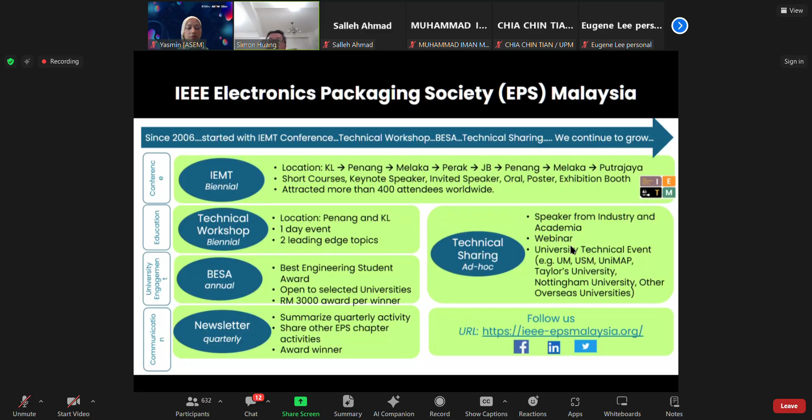Okay, this is the news in 2024. Prime Minister Anwar announced Malaysia will train certified engineers to become a chip hub.

This is quite important because, to be honest, for the past 3 years, we did see the semiconductor supply chain keep moving out from Greater China to Korea, to Japan, to Vietnam, Thailand, and including Malaysia. So that's why Anwar has ambitions to train more and more engineers in order to win this business.

So not only ASEM, but also EPS, we did contribute to build a talent pool through the webinar, the conference, the training.

Okay, this is a quick introduction about myself. 16 years in the semiconductor packaging backend, including wafer level CSP, fan-out wafer level packaging, and panel level.

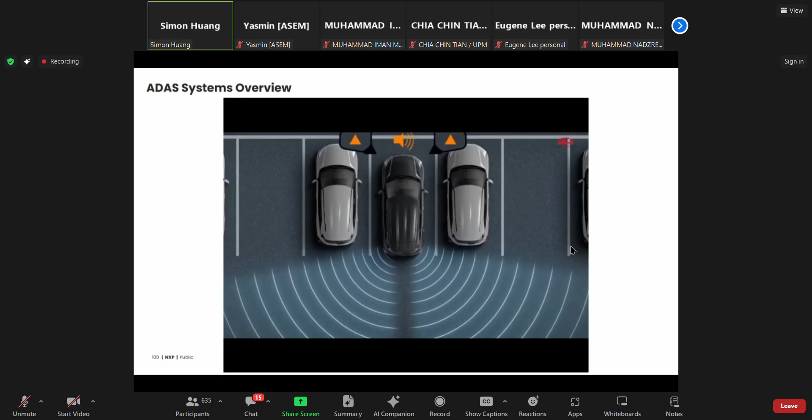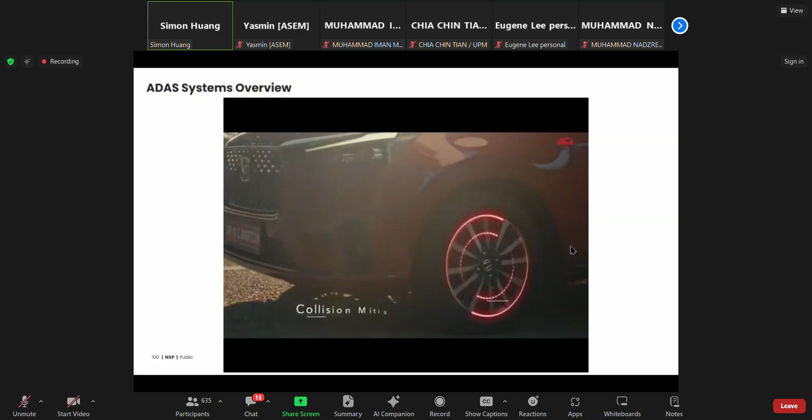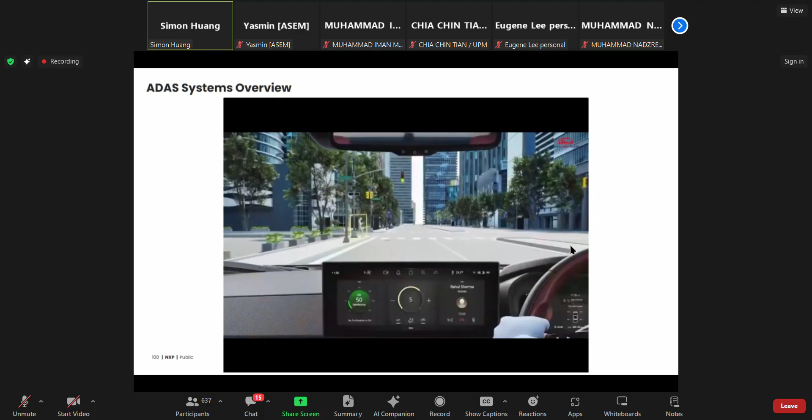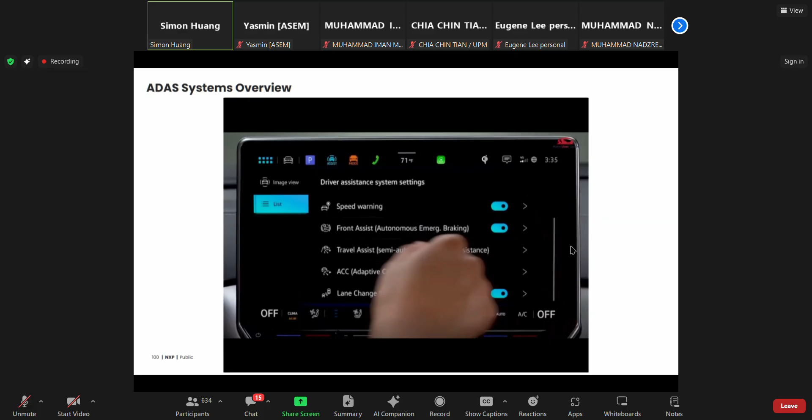Have you ever wondered how modern cars can detect obstacles, maintain lanes, and even brake automatically? Welcome to the world of Advanced Driver Assistance Systems, or ADAS, an innovation that's making driving safer, smarter, and more convenient. What is ADAS? Advanced Driver Assistance Systems is a collection of technologies designed to assist drivers and reduce human error on the road. By using sensors, cameras, radar, and artificial intelligence, ADAS enhances vehicle safety and driving comfort. These systems act like an extra pair of eyes on the road, providing real-time alerts and even taking control when necessary to prevent accidents. If we talk about key features, ADAS includes various safety features, some of which you might already have in your car. Let's check them out. Adaptive Cruise Control maintains speed and automatically adjusts to keep a safe distance from the vehicle ahead. Lane Departure Warning and Lane Keeping Assist alerts the driver when unintentionally drifting out of the lane and gently steers the car back.

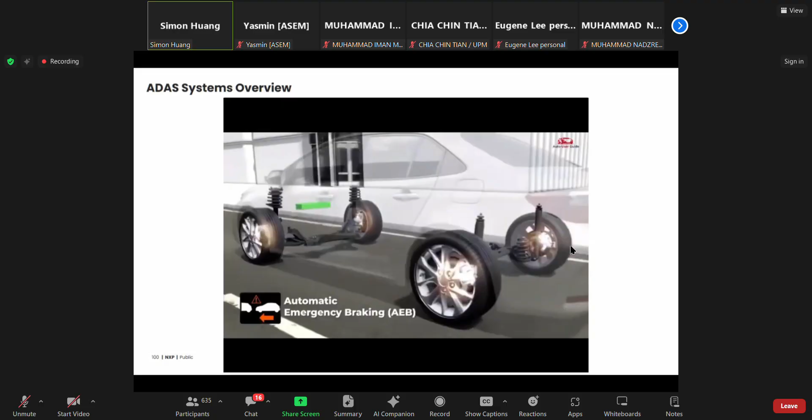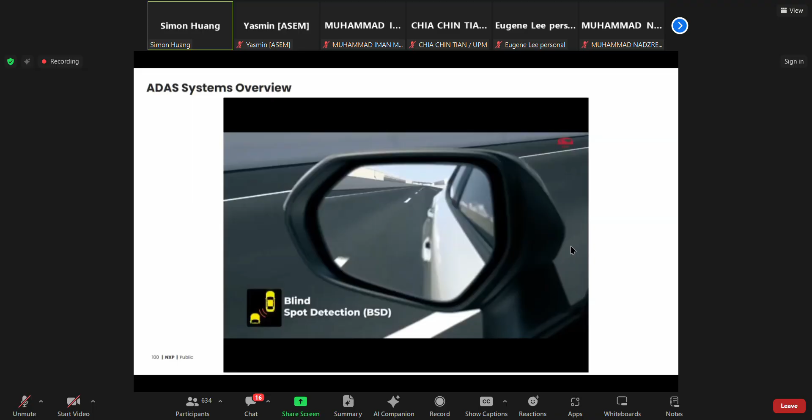Automatic Emergency Braking detects potential collisions and applies the brakes to avoid or minimize impact. Blind Spot Detection monitors the vehicle's blind spots and warns the driver of approaching vehicles. Traffic Sign Recognition reads road signs like speed limits and stop signs to keep drivers informed. Parking Assist and 360-degree cameras help with parking by detecting obstacles and providing a bird's-eye view of the surroundings.

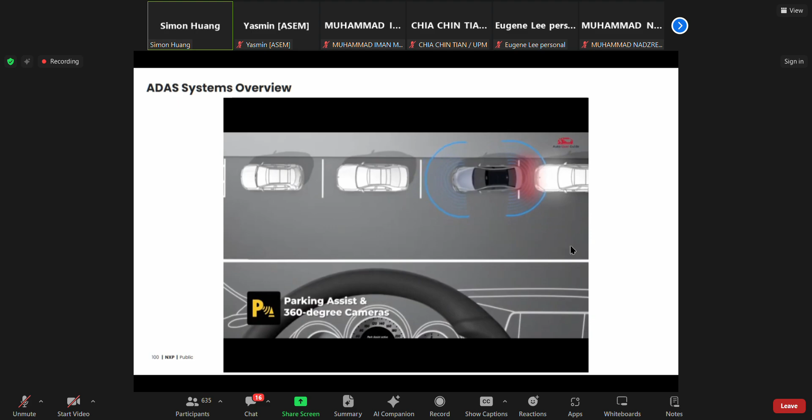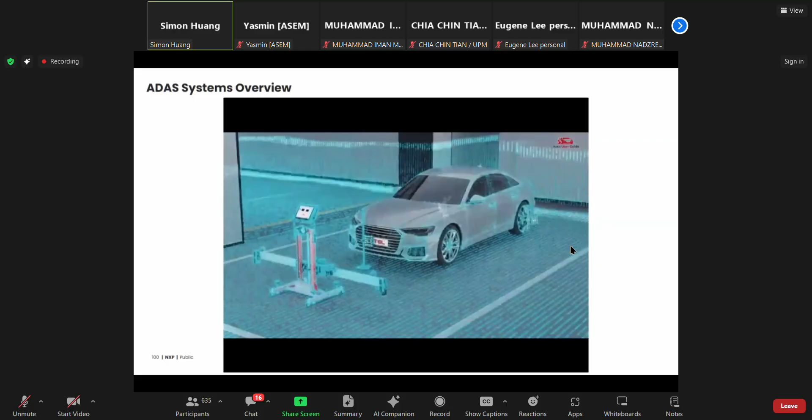With these advanced features, ADAS significantly reduces driver workload and increases road safety. But how does it all work? ADAS relies on a combination of hardware and software to function efficiently. Here's a quick look at its key components.

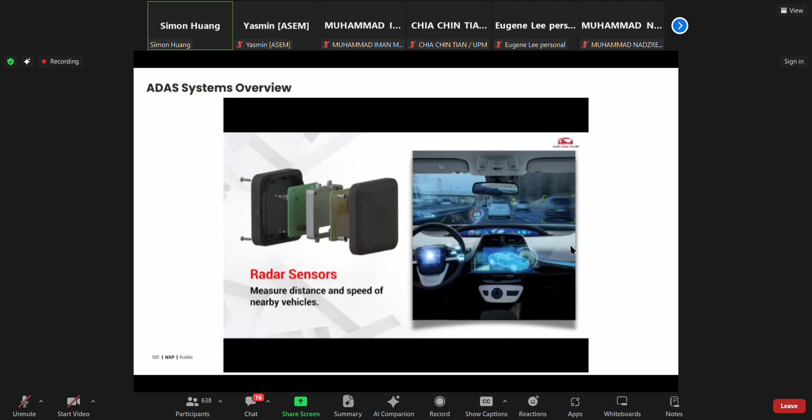Cameras identify lane markings, traffic signs, and pedestrians. Radar sensors measure distance and speed of nearby vehicles. LiDAR, light detection and ranging, creates a 3D map of the surroundings for precise detection. Ultrasonic sensors assist with parking and detecting objects at close range.

ECU, Electronic Control Unit, is the brain of the system that processes all data and makes decisions. These components analyze the driving environment in real time to enhance safety. But what's next for ADAS?

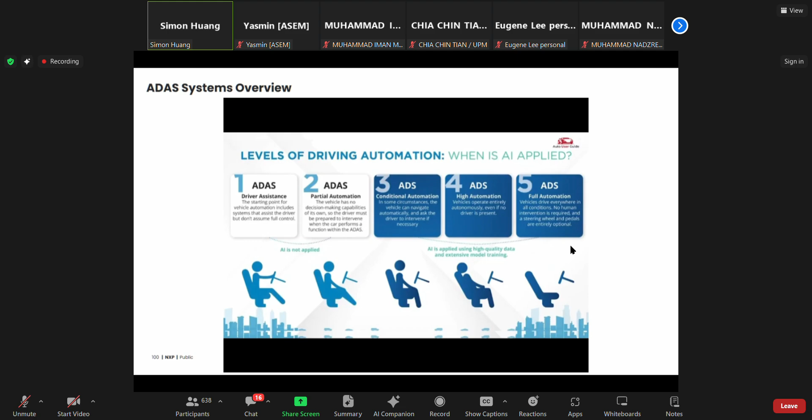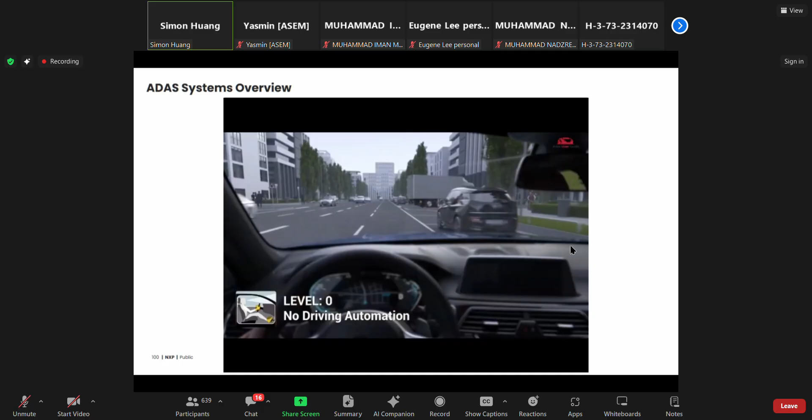Levels of driving automation: driving automation is categorized into 6 levels. At level 0, the driver is entirely responsible for all driving tasks. The vehicle may provide momentary assistance through warnings or emergency interventions, but control remains with the driver.

Level 1 introduces systems that assist with either steering or acceleration-deceleration. An example is adaptive cruise control, where the vehicle adjusts its speed to maintain a safe following distance.

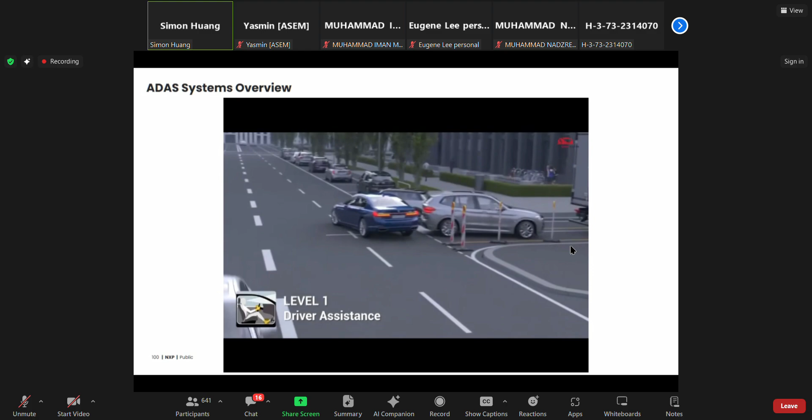At level 2, the vehicle can control both steering and speed simultaneously under certain conditions. However, the driver must remain engaged and monitor the environment at all times.

At level 3, vehicles can manage most driving tasks in specific conditions, such as highway traffic jams. The driver can disengage from driving, but must be ready to take over when the system requests.

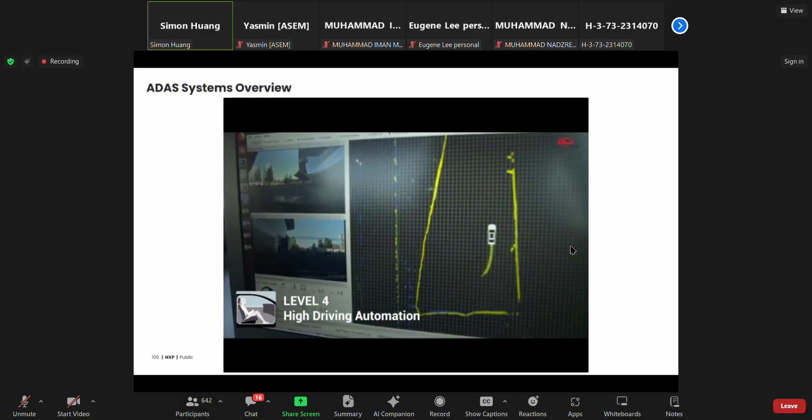At level 4, the vehicle is capable of performing all driving functions within certain environments, like urban centers or designated routes, without human intervention. The system can handle scenarios even if the driver doesn't respond to a takeover request.

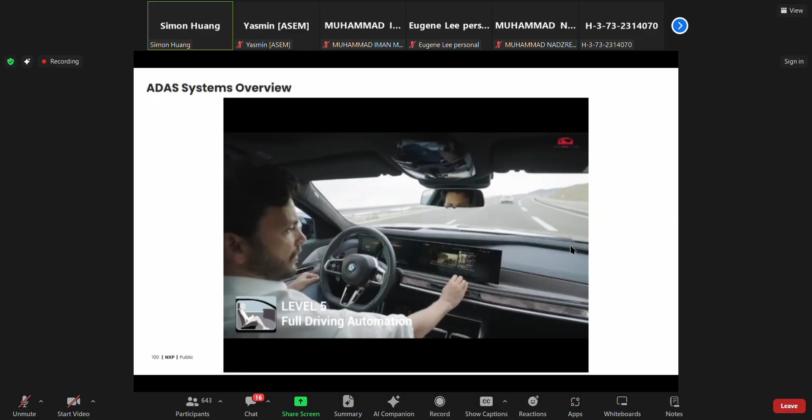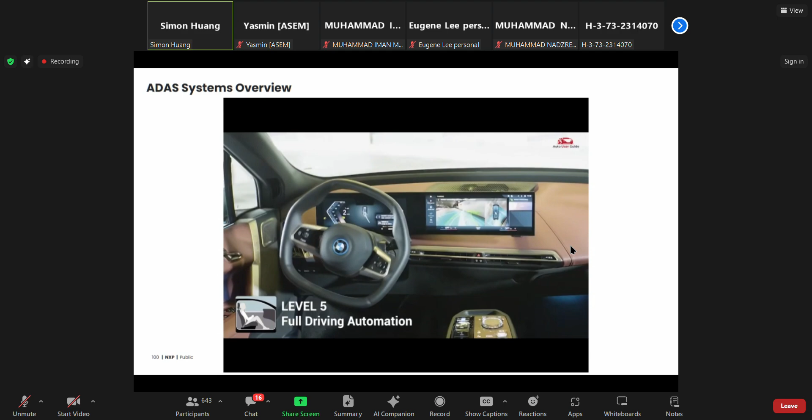Level 5 represents complete automation. The vehicle can operate on any road and in any condition a human driver could, without any human input. These vehicles may not even have traditional controls like a steering wheel or pedals.

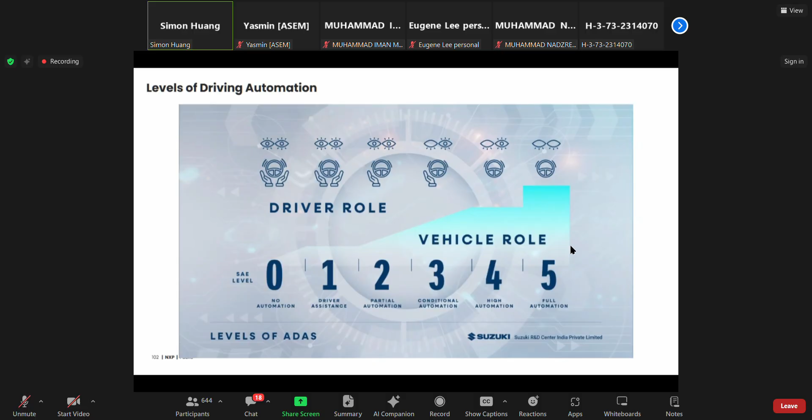In the real world, some companies and cities are already operating level 4 vehicles without any human driver, including 3 cities in the USA operated by Waymo, 3 cities in China, and 1 city in Abu Dhabi. So this is really happening in the world.

But this level 4 comes with some conditions, on special roads with good weather. If there is bad weather, then level 4 cannot be operated, in order to protect human life.

Okay, then let's step into the ECU, Electronic Control Unit, or we call it the electronic control module. In fact, there are so many electronic control units within a car. I will play a video, but since it's too long, I'll only play roughly 3 minutes.

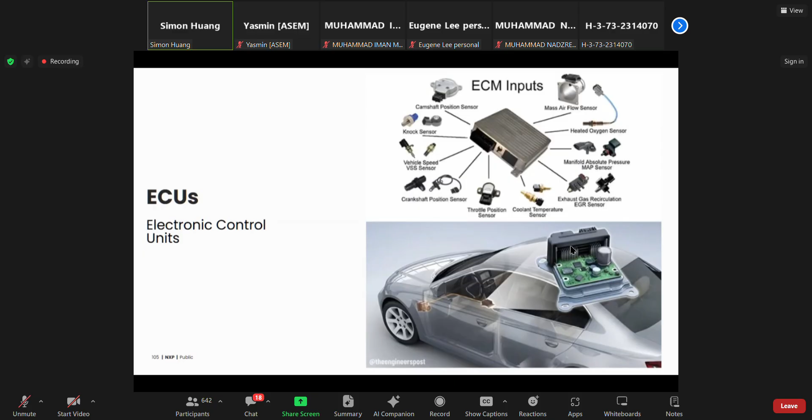This is the overview of the different domains, the ECU names, and their primary functions. Okay, then I'll spend more time on the video playback.

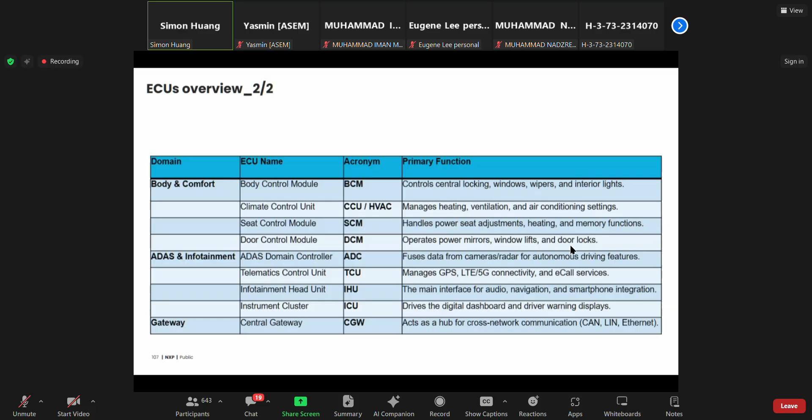In fact, the ECU is the brain of the system. They process data and make decisions. Wait a moment now, here's the video.

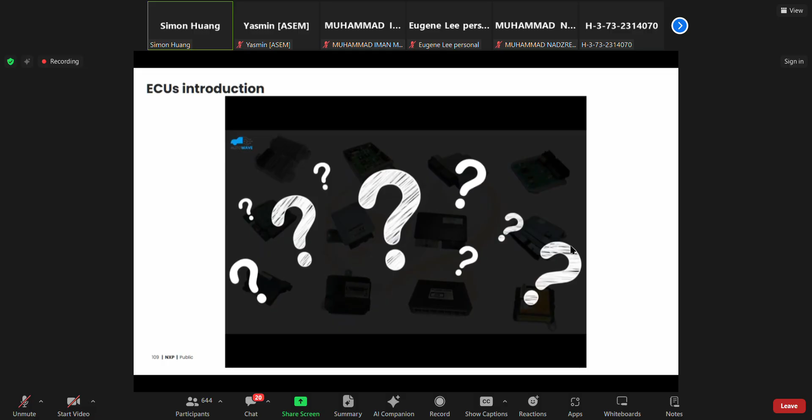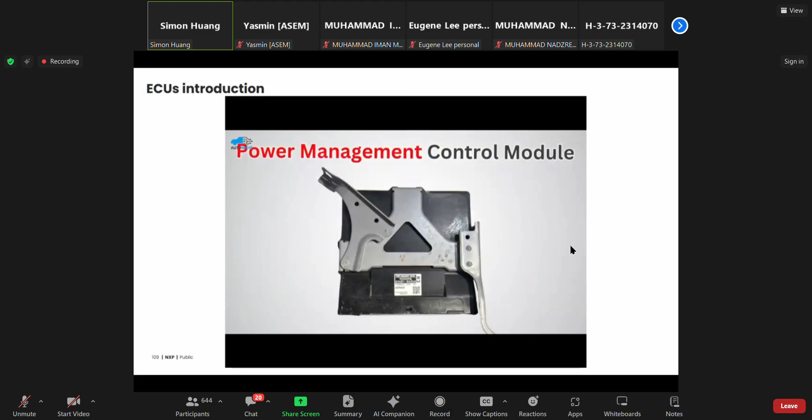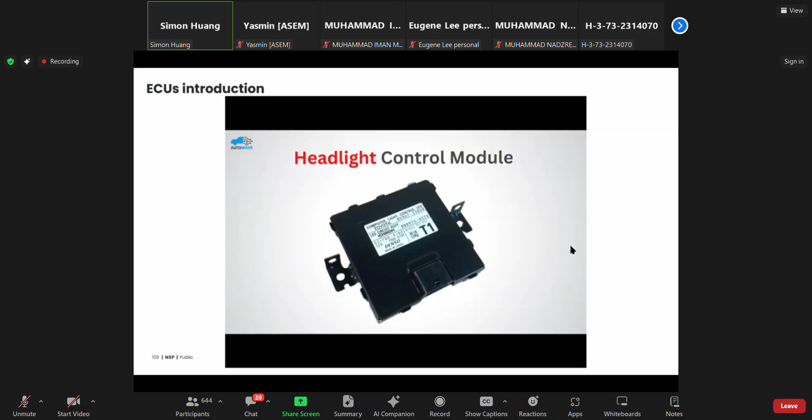In today's video, we will learn how many ECUs, that means electronic control units, are found in a mid-range car and in a modern car. We will also learn which computer controls which system. Today, we will understand every single ECU present in the car in a very easy and clear way. After watching this video, you will not need to ask anyone what BCM does, what is the difference between ECM and PCM, and what is the role of the other computers. The video might be a bit long, and in the end, we will also cover many very important and basic things related to ECU, so this is the most important video for EFI auto electrician beginners.

Before moving forward, let's understand some general things so that you don't get confused later. ECU means Electronic Control Unit. This is basically a general term which is used for any electronic control unit in a vehicle, like ECM, BCM, PCM, TCM, and others. That means we can say all of these are electronic control units. Some manufacturers also call ECU as Engine Control Unit. That's why its exact meaning depends on the context, whether we are talking about a general electronic control unit or specifically an engine control unit.

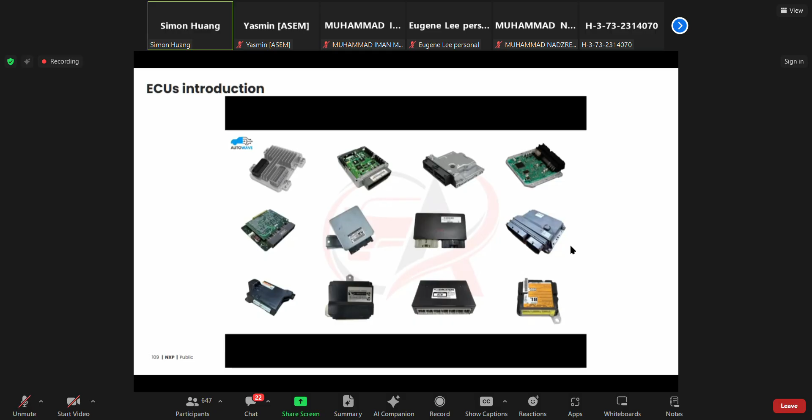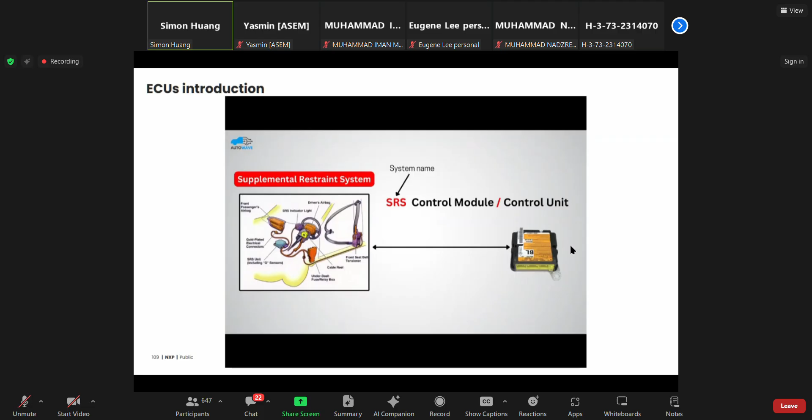All the computers in a car are called by their system name with control unit or control module. For example, the computer that controls the engine is called the engine control unit or engine control module. The computer that controls the transmission is called the transmission control module. In the same way, ABS is one system, and the computer that controls this whole system is called the ABS control module or ABS control unit. SRS is also one system, and the computer that controls this system is called the SRS control module or SRS control unit. Some manufacturers say control unit and some say control module. Actually, both are two names for the same thing.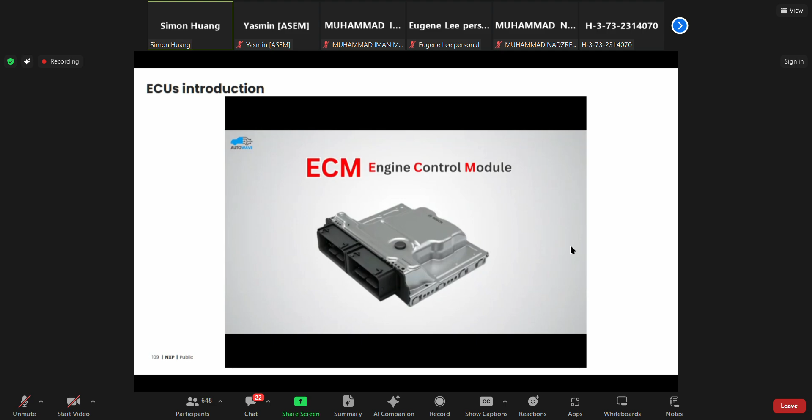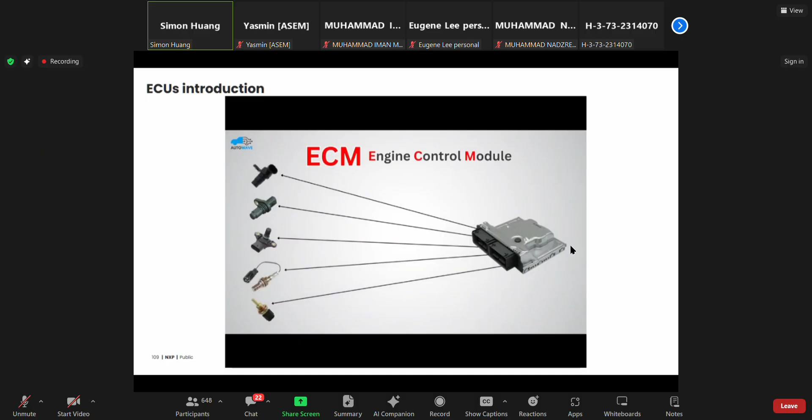ECM full form is Engine Control Module. ECM is responsible for all parts of the engine. All sensors on the engine, like camshaft position sensor, crankshaft position sensor, MAP sensor, oxygen sensor, coolant temperature sensor, and others, are controlled by this unit. This ECU gives power supply to every sensor and receives output in return, so that different engine operations like fuel injection, ignition timing, air-fuel ratio, idle speed, and others can be controlled.

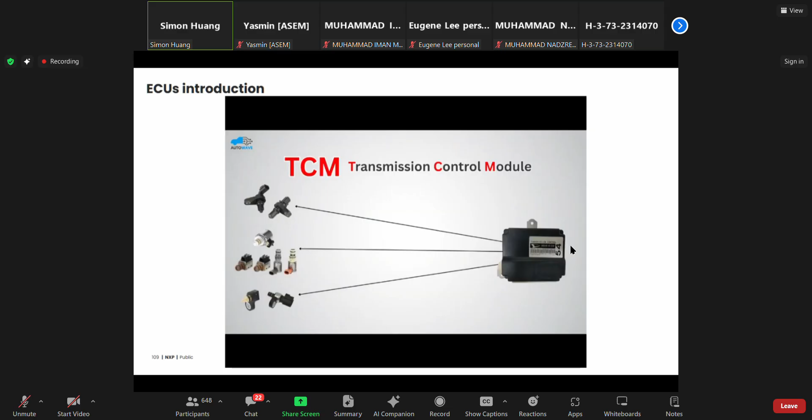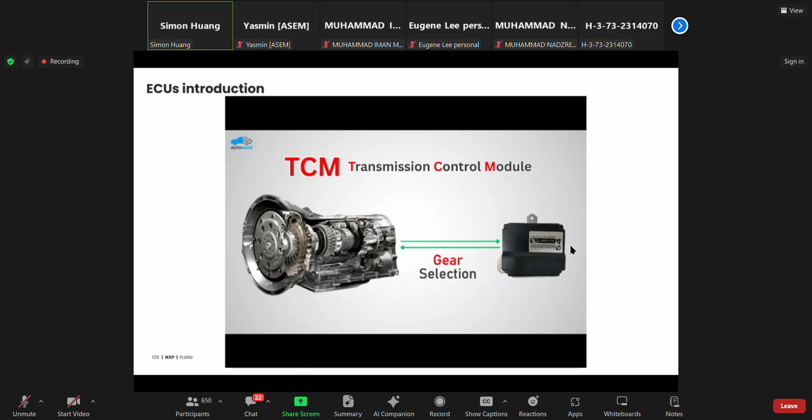TCM full form is Transmission Control Module. TCM is responsible for all parts of the automatic transmission. All sensors and actuators on the automatic transmission, like input and output shaft speed sensors, solenoids, oil pressure and oil temperature sensors, and others, are controlled through TCM. TCM gives input supply to all sensors on the transmission and receives output signals in return, so that transmission operations like shift timing and gear selection can be controlled. Note, manual cars do not have TCM because in manual cars, operations like shift timing and gear selection are the driver's responsibility.

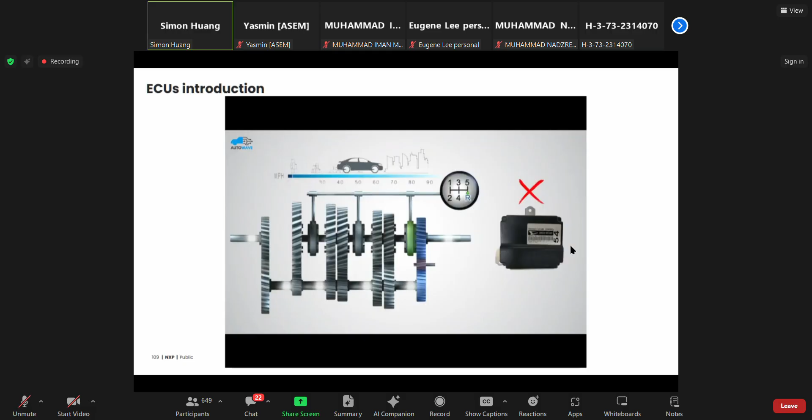PCM full form is Powertrain Control Module. It basically combines ECM and TCM into one single unit. That means, in vehicles where there is only one electronic control unit for both ECM and TCM, it is called PCM, Powertrain Control Module. PCM monitors and controls all operational parameters of both engine and transmission.

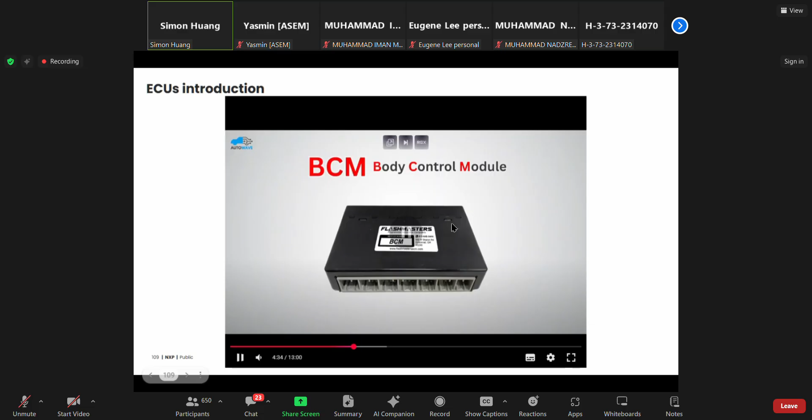BCM full form is Body Control Module. BCM controls the electrical systems related to the vehicle body, like power windows, central lock. Okay, so let me stop because the video is too long.

Next section is about BMS, the battery management system. It's quite important for EV cars especially. There are some elements of the BMS, including the controller, the power management module, thermal management system, and the communication interface, and the safety switch. When the temperature increased too high, then it will switch off to protect the car and prevent the battery burnout. So these are the key purposes of the battery management system. It will monitor the battery, protect the battery, estimate the battery status, maximize the performance, and report it to the user or the external devices.

There's a good video for us to learn about the battery management system. A standard lithium-ion battery pack comes with several benefits. A few examples include high energy density, more charge cycles, low self-discharge rate, and lightweight and compact. However, the outcome could be hazardous if the battery is subjected to unexpected conditions.

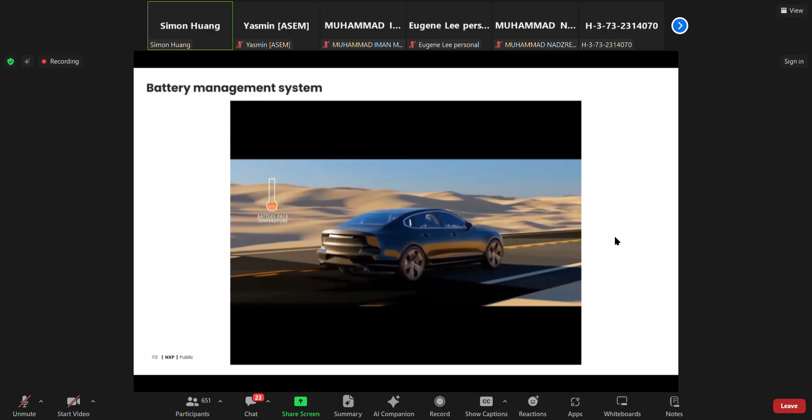Imagine your vehicle running on a sunny day when temperatures could get really hot. When temperatures get above 55 degrees Celsius, a lithium-ion battery could experience something called a thermal runaway, where the battery pack enters an uncontrollable self-heating state and ignites into flames. Now, imagine your vehicle running on a cold winter day when temperatures could reach lower than negative 20 degrees Celsius. With the decrease in temperature, the electrolyte's viscosity will increase, reducing the ionic conductivity, and hence the cell's lifetime drastically decreases.

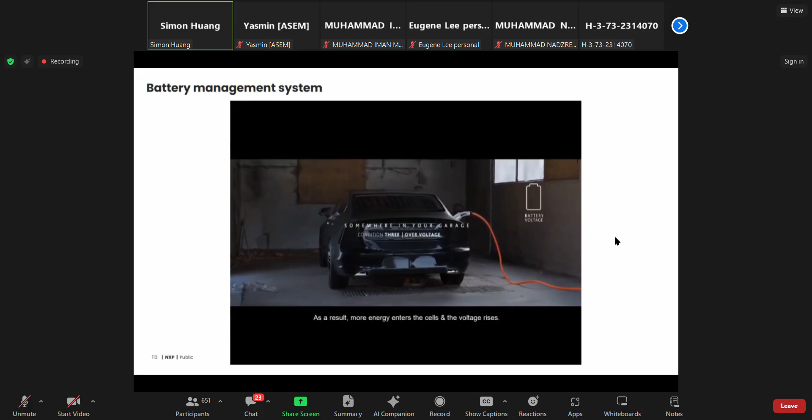Now, imagine charging your lithium-ion battery pack. As a result, more energy enters the cells and the voltage rises. Suppose the battery voltage exceeds the maximum charging voltage. In that case, the excess energy leads to thermal runaway, which damages the battery pack by igniting it into flames. It is recommended to discharge your lithium-ion battery at a constant current and charge at a constant safe rate. However, if it is discharged at a high current or charged too fast, the battery capacity drops over time.

Pulse charging methods have been developed as one of the fast charging methods for lithium-ion batteries. This technique applies a continuous constant current pulse with certain pulse width until the battery is fully charged. The lithium-ion cell might get damaged if operated at high pulse currents for more than a few seconds.

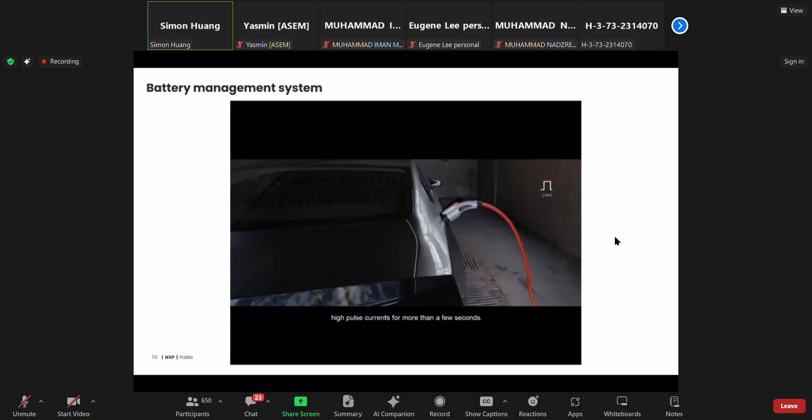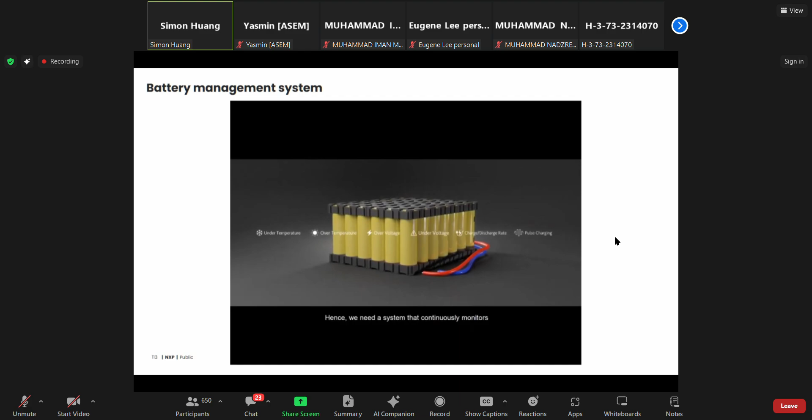In the above different conditions, we saw that a lithium-ion battery is highly liable to unfavorable conditions. Hence, we need a system that continuously monitors the cells to avoid unwanted self-damaging hazards. This is where a battery management system comes in.

The primary purpose of the BMS is to monitor the battery, to protect the battery, to estimate the battery state, to maximize the battery performance, and to report to users and/or external devices, for example the electric vehicle ECU. The BMS does this by measuring the cell voltage, the temperature of the cell, and the cell current. The BMS then collects all the data from these parameters and uses its inbuilt algorithm to estimate parameters such as the battery voltage, state of charge, state of health, temperature, battery capacity, and other critical measurements.

For example, imagine if the battery voltage rises more than its recommended value, then the battery management system automatically cuts off the charging.

Another essential functionality the BMS performs is intelligent cell balancing, wherein the battery voltage is equalized to improve capacity. Also, these concepts will be explored in detail in our future videos. Finally, the BMS should be able to communicate the data or report to users and/or external devices, such as the vehicle ECU, using communication protocols such as CAN bus, RS-485, UART, etc.

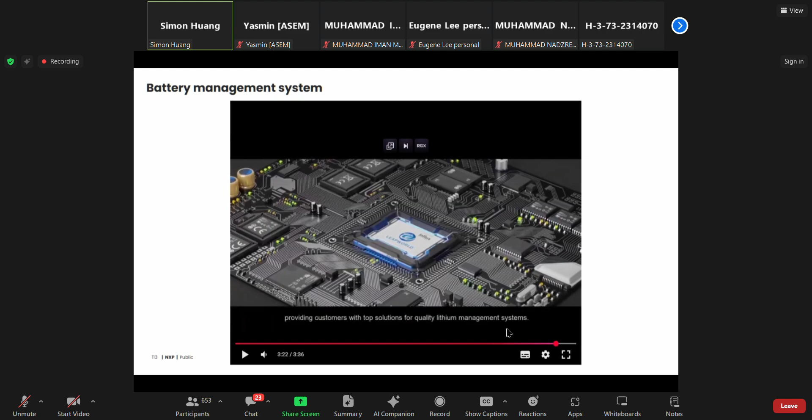Okay, now this is the last session about the radar, the radio detection and ranging. In fact, NXP is the leader of the car radar chipset provider.

Sorry, I'm lagging on the internet. So I will play a video about NXP's real product for the car radar.

So I will show a video about NXP's product. It covers the 4D image radar. It co-works with different companies.

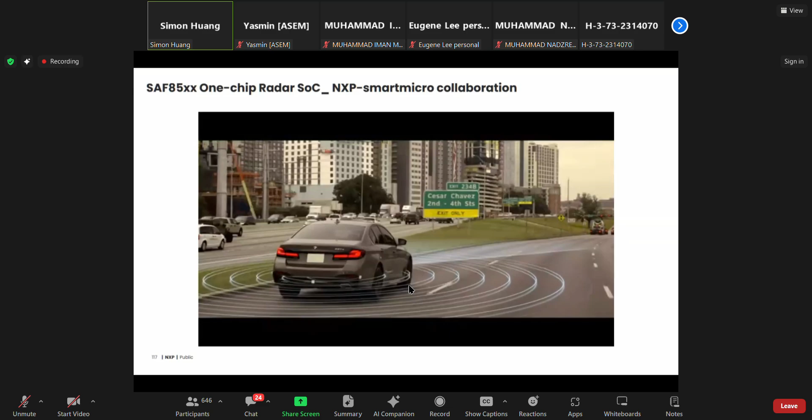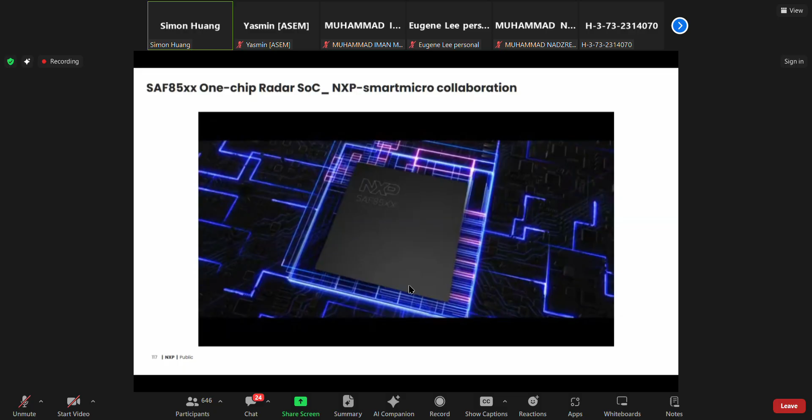NXP is pushing the boundaries of what radar can do, with enhanced performance and unlimited versatility. The third generation RF CMOS radar one-chip SoC SAF85XX uses cutting-edge technology to integrate millions of transistors, enabling high-performance radar sensors in a device that fits on your fingertip. With twice the RF performance, enabling short-range to long-range sensing beyond 300 meters, the device is versatile.

It can be used for adaptive cruise control, blind spot detection, lane change assist, emergency braking, pedestrian detection, and park assist to enable all-round sensing.

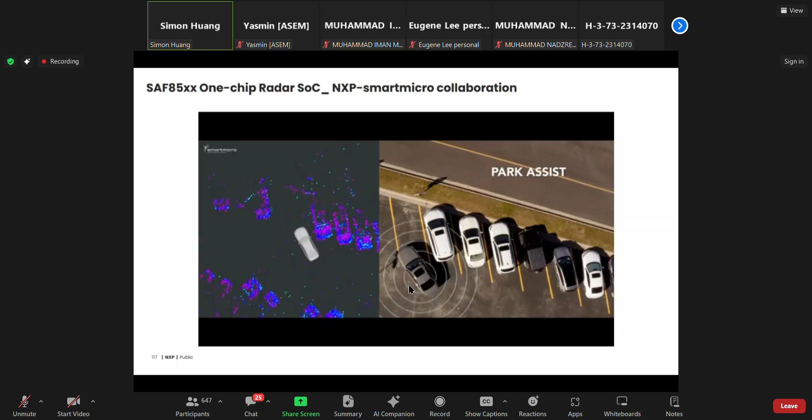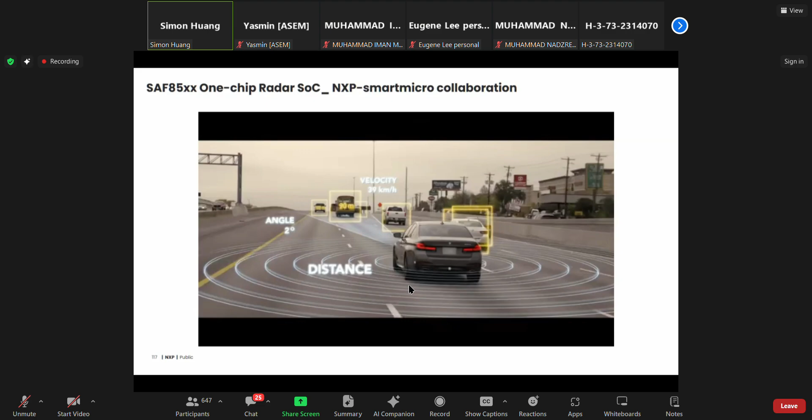Not only does the SAF85XX measure distance, speed, and angle of the object, but also a fourth dimension, elevation, enhancing safety even further. This dynamic 4D sensing is made possible by its 4 transmitters and 4 receivers, combined with a powerful multi-core compute engine. The increased channel count enhances the resolution of the sensor.

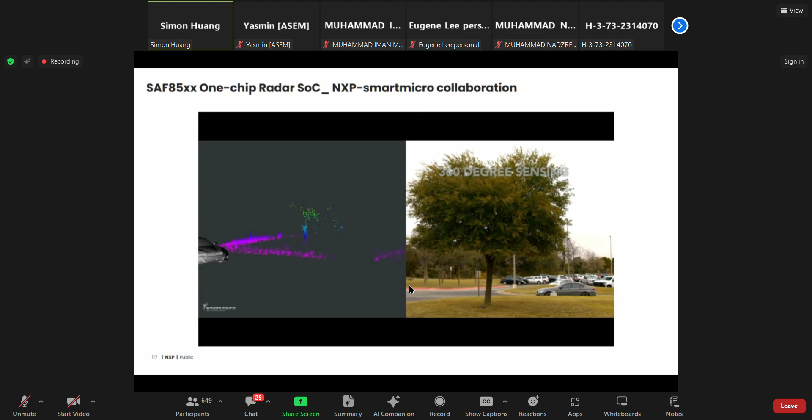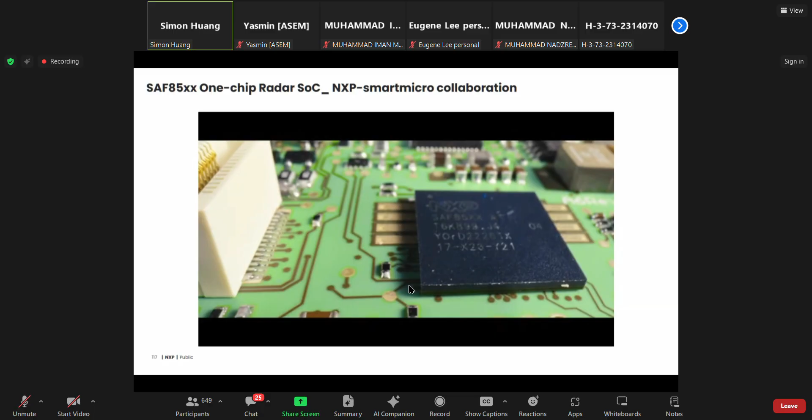This is essential for object detection and separation, sensing more vulnerable road users such as pedestrians, cyclists, and pets. These impressive 360-degree sensing capabilities put the SAF85XX one-chip radar SoC at the forefront of road user safety, revolutionizing safe commuting for everyone. NXP is partnering with smartmicro to bring the SAF85XX reference designs to system integrators and car makers to shorten time to market.

Pushing the boundaries of performance and integration with the SAF85XX one-chip radar, providing safer roads for all users.

Okay, so this is the last slide about takeaway. We can see the automotive semiconductor market really keep increasing, to reach more than 90 billion in 2030.

NXP, a top two automotive semiconductor company, is really a leader in automotive radar chips like the SAF85, the video show. And ADAS really enhances vehicle and road safety by reducing human error, so more and more cars will keep adding the ADAS function.

ECU, a brain of system that processes data and makes decisions. There are so many ECUs within the car, so for the video you can watch offline to learn how many ECUs there are and their functions.

Battery management system is to monitor, protect, and maximize the performance of the battery and the communication, reporting to the user. For the car radar, it really senses the environment around a vehicle using radio waves.

Besides, at the end of this material, I also attach an appendix about the comparison between radar and LiDAR, so you can watch the video offline.

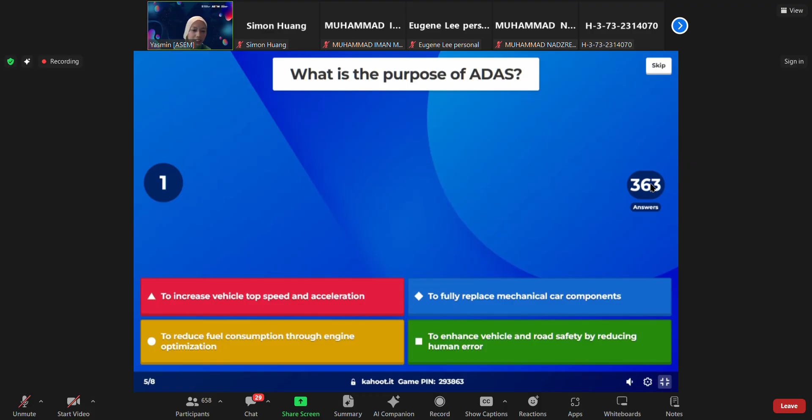So we move to the next question. What is the purpose of ADAS? The first one is to increase vehicle top speed and acceleration. The second one is to fully replace mechanical car components. The third one is to reduce fuel consumption through engine optimization. And the last one is to enhance vehicle and road safety by reducing human error. Let's see which one is correct. So the last one is the correct answer.

So let's see who's leading this time. Lim Wai Q. Oh my god, you're so fast, huh?

So the next one is, what are the primary purposes of BMS? Which one is the correct answer? To increase battery charging speed beyond manufacturing limits. The second one, to convert DC battery power into AC for motors. To monitor, protect, maximize battery performance and report. And the last one is to physically cool the battery using a refrigerant system. So which one is the correct answer? The correct answer is the third one.

So let's see who's leading this time. Lu Wei Han. So you are the fastest hand and quick.

So the next one is, which of the following skills is most critical for a fresh graduate entering IC design or embedded systems? The first one is memorizing data sheets. The second one is high GPA without projects. Or three, understanding how hardware and software interact within a complete system. And the last one is learning only one programming language. Let's see what's the correct answer.

So yeah, most of you guys answered the correct one. So we're going to see Lim YQ.

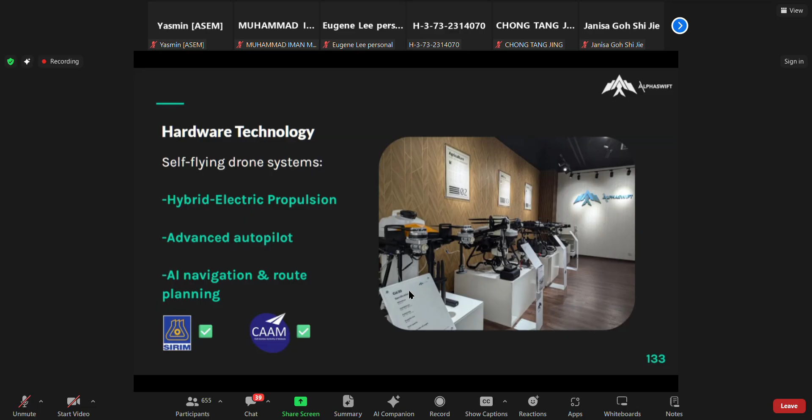We developed our own hardware technology, such as hybrid electric propulsion, autopilot, and AI navigation and route planning.

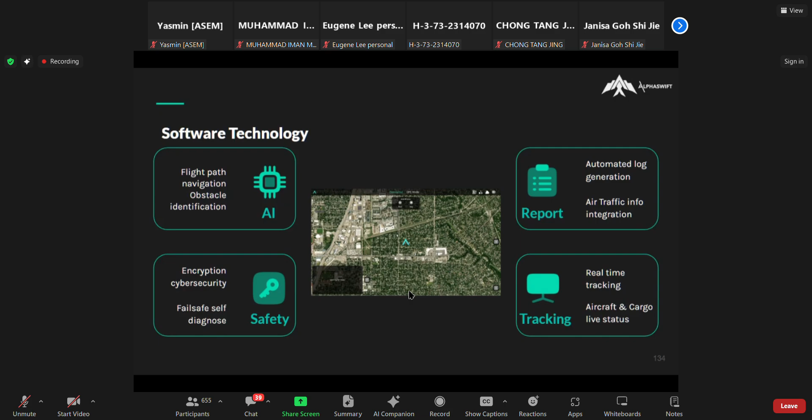For that to work, we also have to develop our own software, which consists of the AI part, reporting, safety, and also tracking.

It is our goal to work our way towards level 5 autonomy, same as how self-driving cars have structured themselves into 5 levels. Level 0 means fully manual—you have to fly it yourself with a remote control. Level 5 is when it's fully autonomous, no pilot inputs needed, able to navigate through various conditions—even severe bad weather or signal communication loss—and still fulfill the mission. That's level 5, which is what we're trying to get to.

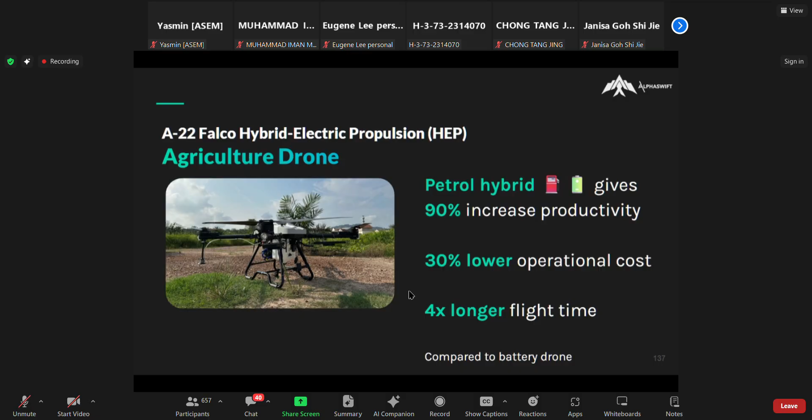We also have technologies that use petrol and gasoline to power the aircraft. This is one of the very cool technologies we have developed. I see a future where hybrid technology is more sustainable and more practical in the drone use case. It will increase productivity up to 90%, lower operation costs by 30%, and give much longer flight time compared to a battery drone.

Bear in mind, this is all happening fully automatic. It's impossible to fly manually because when it flies away, you cannot see the drone anyway.

Is it possible to give you the full screen? Yeah, that's nice.

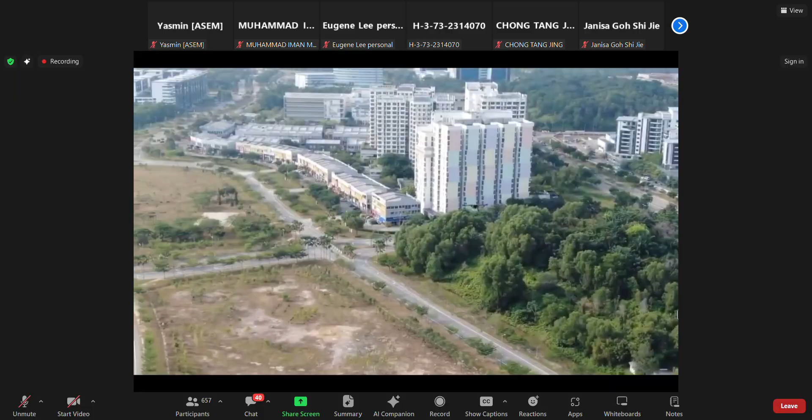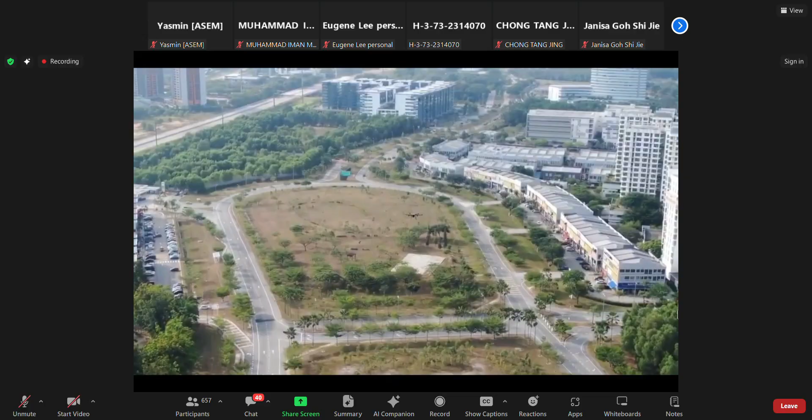We're envisioning a future where drones can be really helpful in both urban and rural kampung areas. The drones will be able to carry all sorts of big and small cargo, all decentralized—we don't have to rely on a lorry or truck anymore. The drone carries cargo through the shortest path, flying straight to the destination, crossing roads, avoiding jams, reaching the destination in the quickest way. The drone can fly 1 kilometer in a minute.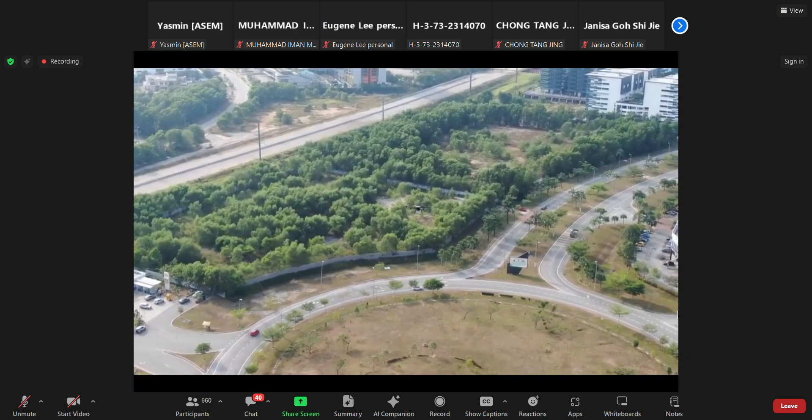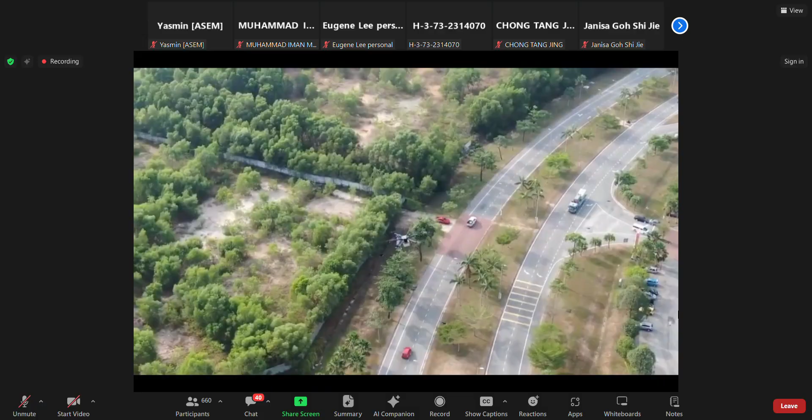While we're looking at the video, I'm also looking at the chat. Yes, there's a question—it has to be regulated by many departments. It's not an easy job, this one.

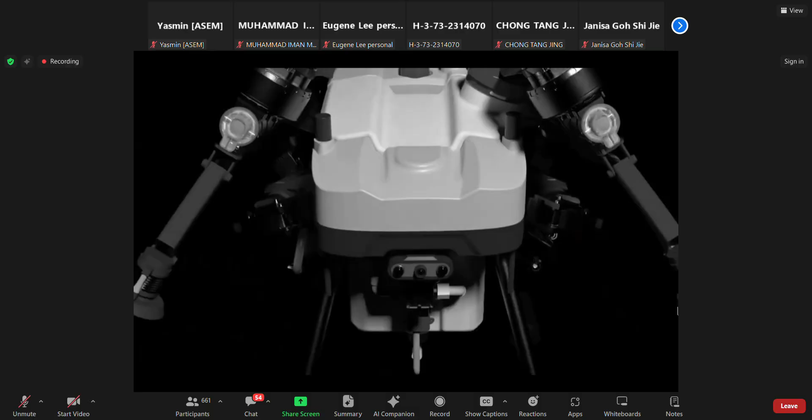The altitude of our flights are typically capped below 120 meters, which is 400 feet, and that's a regulation kind of thing. But if we want to, we can fly as high as 3,000 to 4,000 meters - physics wise, it should not be a problem.

Here you can see the drone is being filled up with water. The drone flies off after a touch of a button, and the drone flies over the target to shoot them with a little bit of water.

Here's when RTK is used. RTK is important here because we need the centimeter level accuracy to shoot targets accurately. So our technology can shoot oil palm trees with centimeter accuracy.

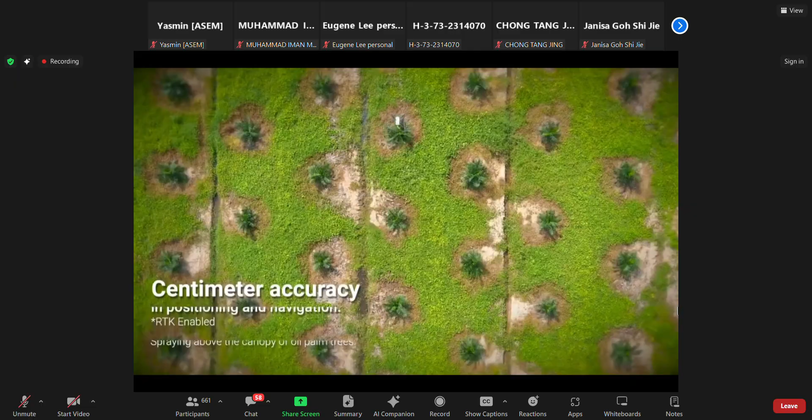Yes, it's fully automated - there's no way you can shoot 1,000 targets, it's a very terrible grind if you were to do this every day. It's fully automated, it's a bot - we are basically botting the world. And this is also a bot kind of thing, you just leave it and it does the work by itself.

This is quite easy, this is just spraying on paddy. This does not require RTK.

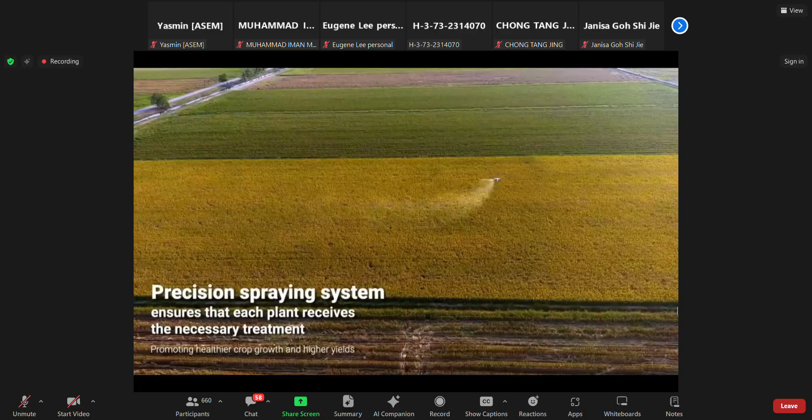What is the most popular drone use case in Malaysia right now? I would think it's taking videos and photos, if you count those little toy drones that people use for their parties and vlogs. I think that's the most basic use case.

For our company, where we carry heavy cargo, we're pushing towards offshore cargo delivery, medical delivery supplies, and agriculture. Agriculture spraying is very popular in Malaysia—there are about 5,000 drones estimated in Kedah, and a couple thousand more elsewhere. I think there are at least a few ten-thousands, maybe close to 100,000 drones in Malaysia used for video capturing and photography, the small toy drones you can buy from online platforms.

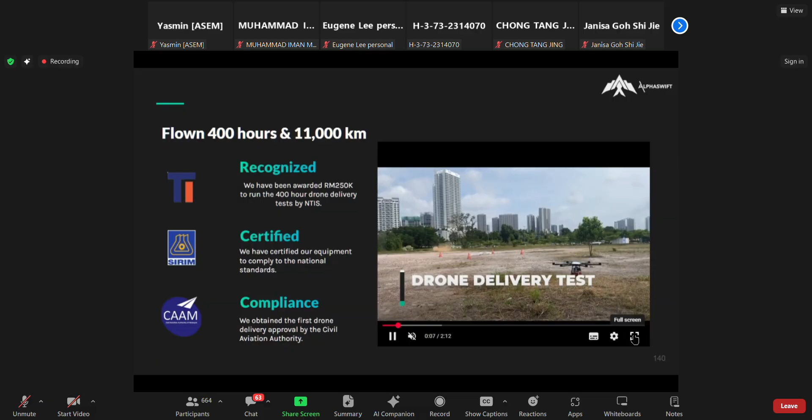Next slide. This shows that our drone has flown for more than 400 hours. It's passed through many reliability tests, and it's also certified by all these regulatory bodies.

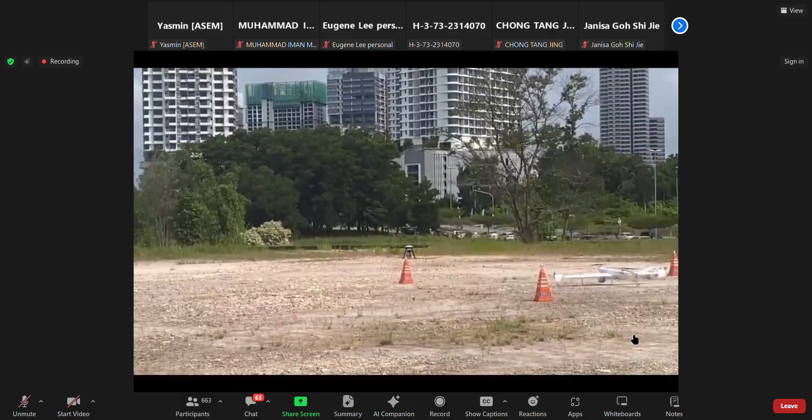Our drone is able to fly in Scale 6 winds, about 10 meters per second. Scale 6 actually feels breezy, and anything more than that, we do not fly.

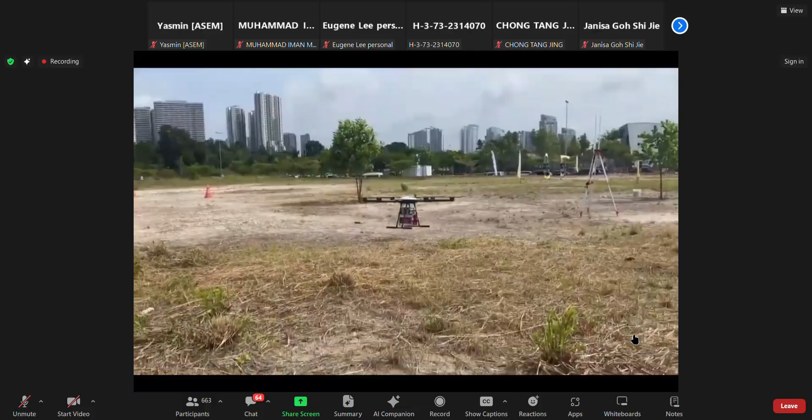We also have night flying capabilities, shown later in this video. Night flying is really cool—it requires a special set of certifications and is a huge regulatory nightmare, but it's worth it, because half of the 24 hours is night, so we'll probably have to operate at night.

It's coming anytime now. In the future, if you need something in a real emergency at night, we're going to have it delivered using drones, maybe at 4 a.m.—it should be something really urgent.

And it's coming in quietly. So this is really cool. Okay, let's see chat.

Mapping area in unstable weather and geography like Malaysia - yeah, for example, if it's raining, we do not fly. If the weather permits, then we do go. And if we're flying and there's rain coming in, we just have to make a decision either to land or continue the mission.

Those are things I'd like to work with the operator on, because AlphaSwift by nature is a manufacturer. We manufacture the drones and sell them to operators. I hope one day you guys can be an operator company - you can get the drones from me and send cargo to your customers.

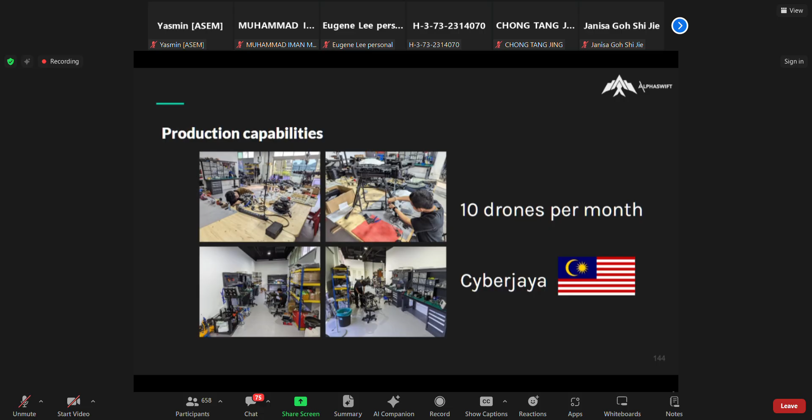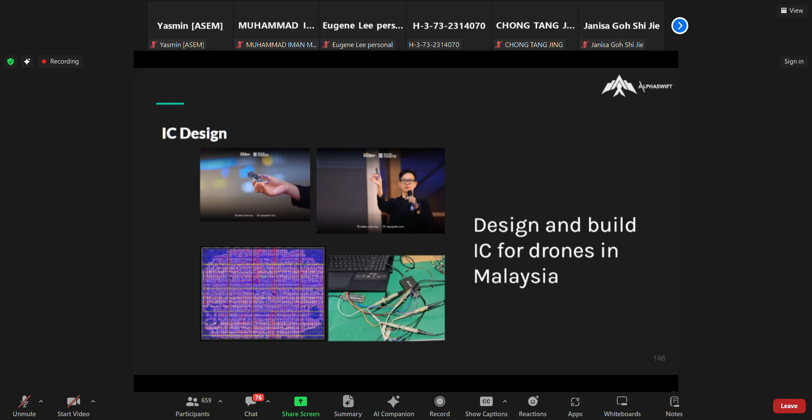Here's the cool part - we design and build ICs in Malaysia for our drones. And that's why I recommend you join the ASEM program. Next.

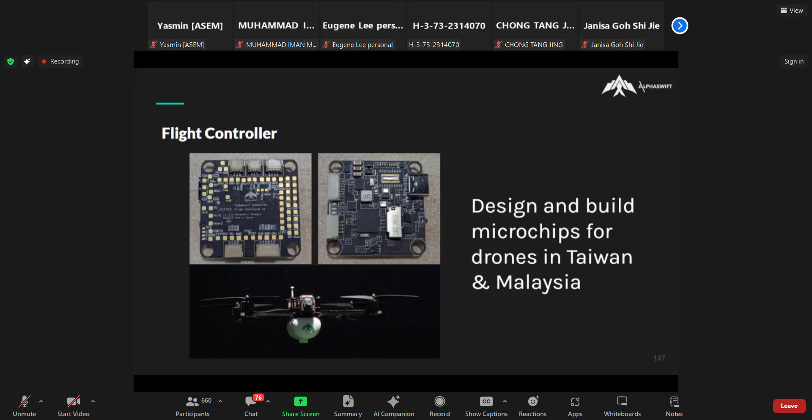There we go. We design and build our own microchips for our drones, made in Taiwan and Malaysia. How we do that is we need to utilize programs like what ASEM is providing. Next.